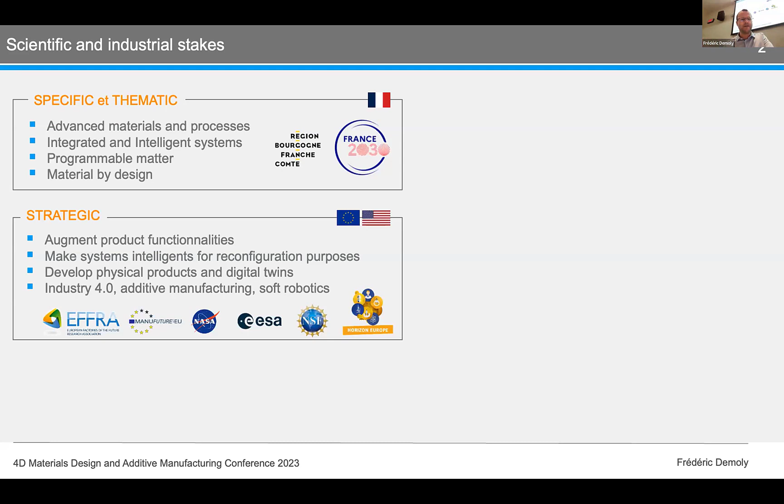We can also see some specific topics at the international level, for instance at Horizon Europe or NSF, where the focus or the expectation is on augmenting product functionality, making systems intelligent for reconfiguration, developing physical products with digital twins and Industry 4.0 or even 5.0.

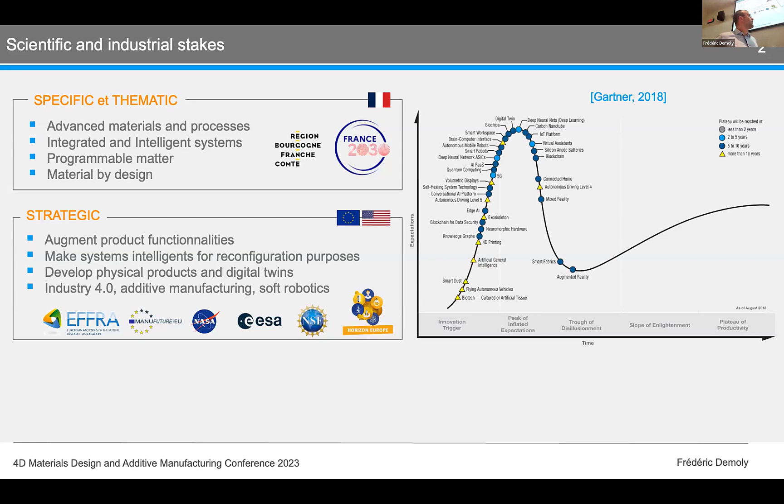I just integrated into my slide a picture of the hype cycle from Gartner from 2018, where 4D printing was at the innovation trigger stage. We can think that this technology is now at the top of the curve, and we will start a kind of disillusionment stage. So we have a lot to do in order to increase the TRL level of the technology, and we also have to find disruptive applications in order to demonstrate that this technology has a future.

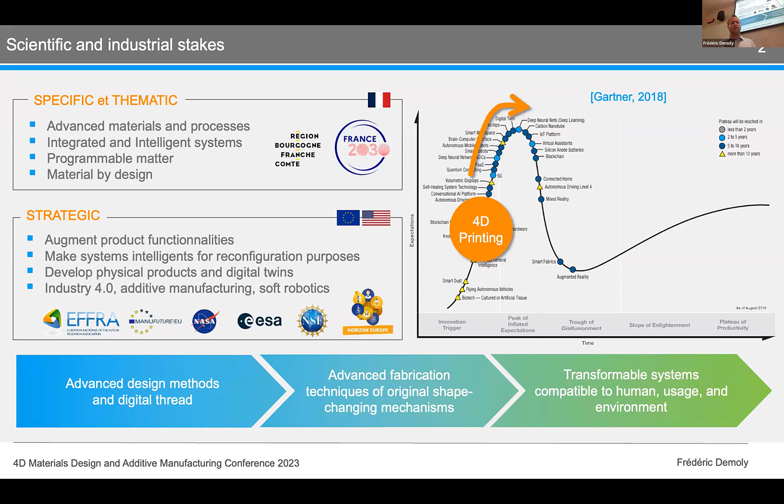For all of these reasons, my research group and I have developed efforts in advanced design methods and digital thread. We are also focused on advanced fabrication techniques of original shape-changing mechanisms to create transformable systems compatible with human usage environments.

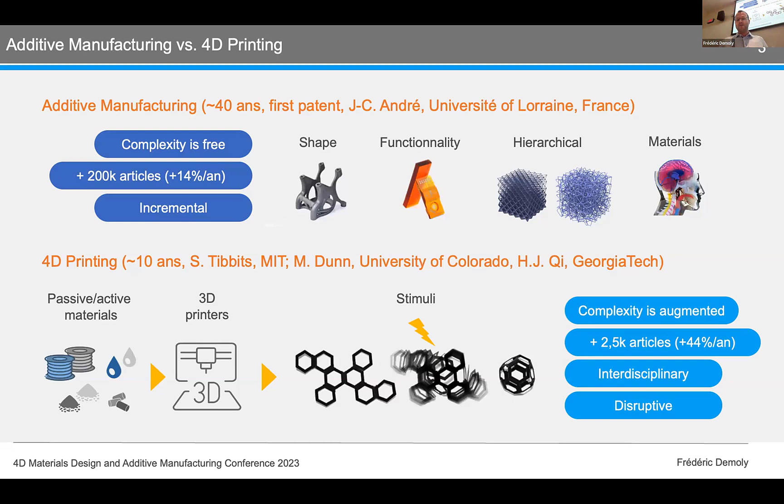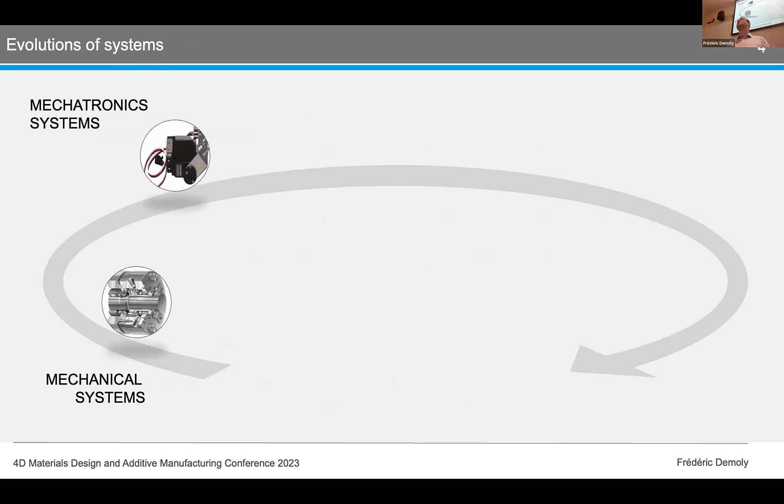What I can also observe from a system point of view is that the design efforts were made so far on mechanical systems, mechatronic systems, and over the last decades on connected objects and cyber-physical systems. And what we can see from the research agencies is that much more is expected from smart systems.

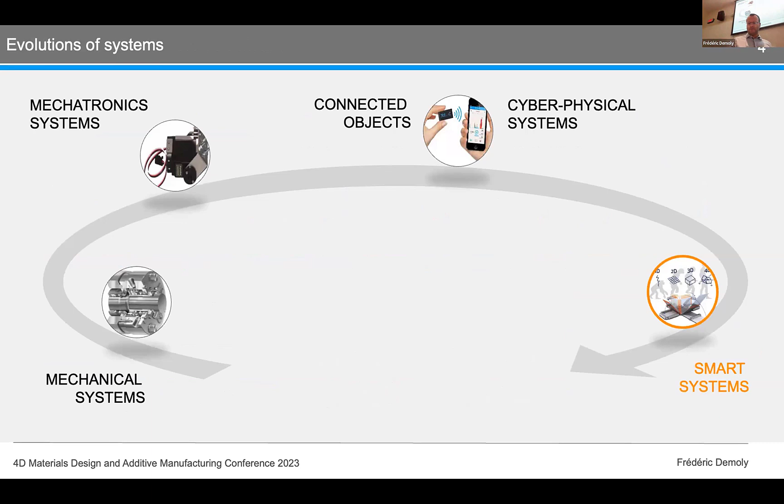And we can also give an estimation of the capability maturity model for each system. Most of them are at the top of the capability maturity model, called optimizing, and smart systems are still ad hoc. This novel technology is still developed in the labs.

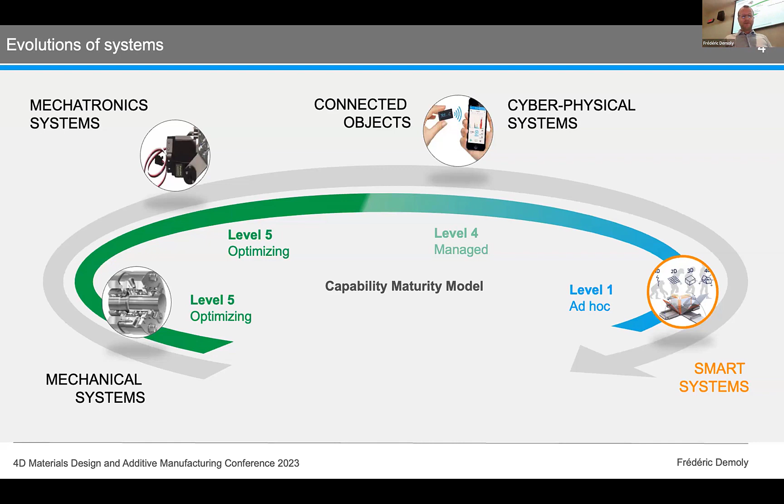We can also highlight some industrial initiatives toward smart systems in the car industry with the BMW concept car. We can see some tires from Hankook, some shoes, even some stents. And through these case studies, or these innovative concepts, we can see that what is expected is systems that are adaptive, reconfigurable, deployable, and transformable.

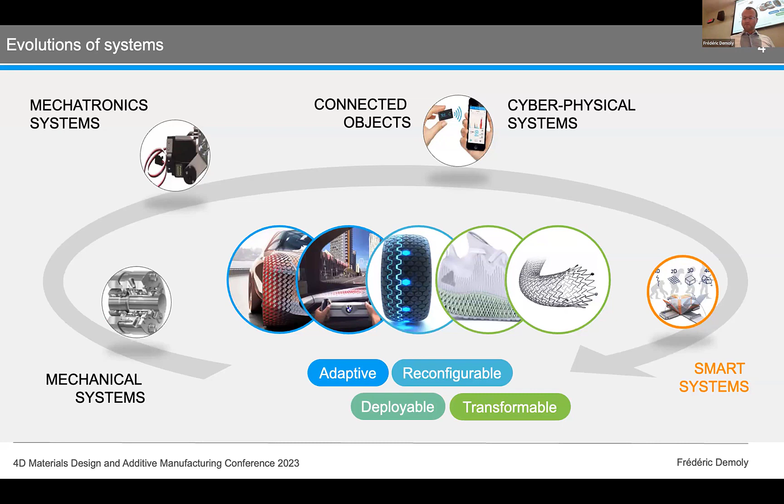I tried to sum up 4D printing in 2 slides to sum up the research efforts. The main efforts are focused on single-material 4D printing, which means that we use only one head, let's say, and we print the smart material, and we can exhibit a shape change by playing with the printing path or with the polymerization intensity.

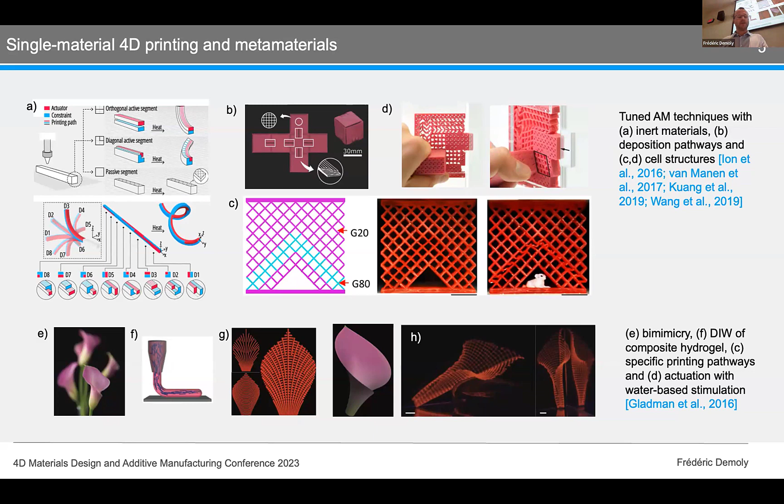Another strategy is multi-material 4D printing in order to improve the mechanical performance of these soft materials. The idea is to combine active and inert material into a single structure.

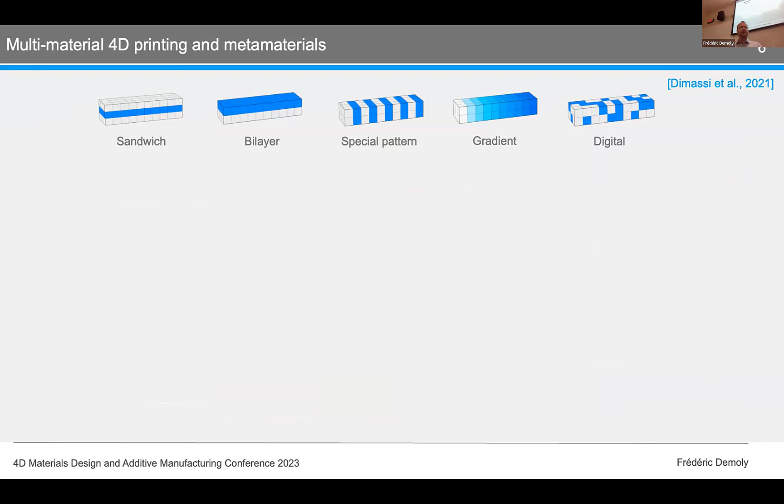Here, I just put some material distribution categories, from sandwich, bilayer, special pattern, gradient, and digital, to which I introduce some examples. We can see here that the idea is to properly distribute the material in the structure in order to achieve original or specific shape changes.

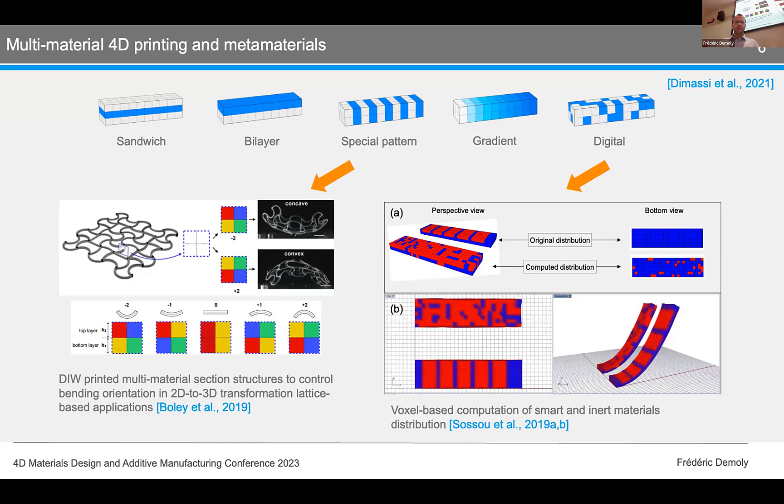I also tried to understand the current state of smart materials in terms of mechanical performance. So I drew some diagrams that show on the x-axis the main categories of smart materials: SMP, SMA, piezoelectric, hydrogel, IPMC, LCE, compared to muscle.

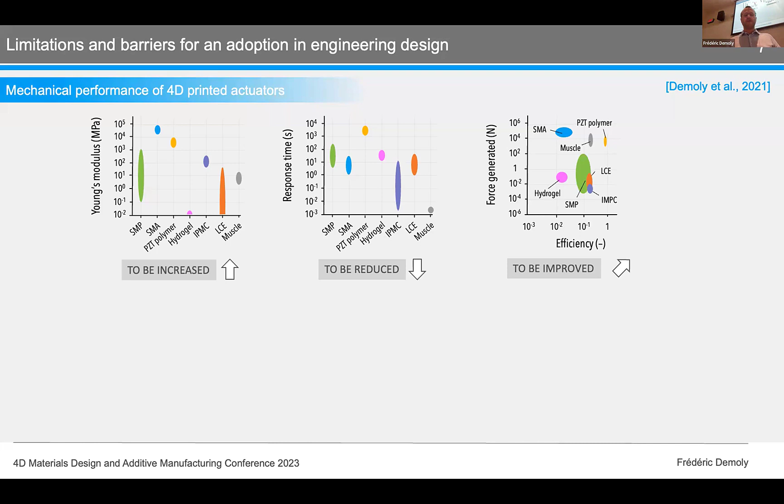And the idea is to put effort in order to increase their Young's modulus, reduce response time, and improve their efficiency, even their force generation. And what we can also highlight is the limitation related to the process.

The process of smart material elaboration is very hard for non-experts to develop smart materials. They are not available. They need tuning steps. They have limitations in terms of functional fatigue. We have also some limitations in terms of the additive manufacturing process, in terms of material-process couplings, multi-material capacity, induced anisotropy. That is sometimes an advantage for 4D printing.

And also another important aspect is the third pillar of 4D printing, I mean stimulation. So we have to consider the temporal effectiveness. We have also considered that the stimulation can be inside the structure, can be local, and we have to consider the place of the stimulators.

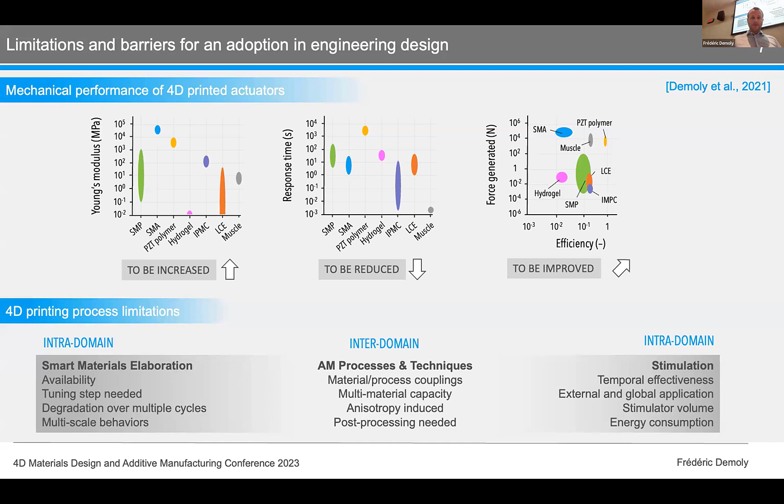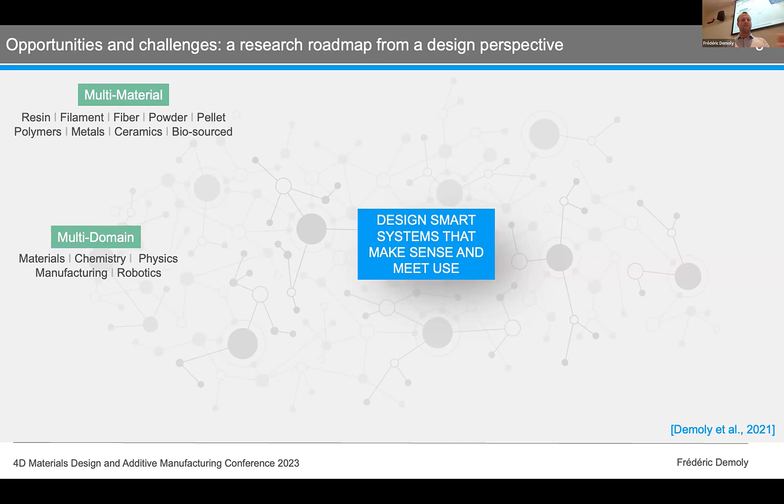So for all these reasons, I try to build a research roadmap from a design perspective, where the main objective is to design systems, smart systems that make sense and meet use. And to do so, we have to consider many facets, if I may say: multiple materials, multiple domains, material chemistry, physics, engineering, robotics, manufacturing, multiple additive manufacturing techniques, multiple physics and energy, multiple scales and temporality.

We have to consider also multiple functions and multiple worlds. So most of the effort is made on the physical world. I'm working also in the digital world. We have to connect this world with the cyber and the social world in order to improve interaction between the user and the object.

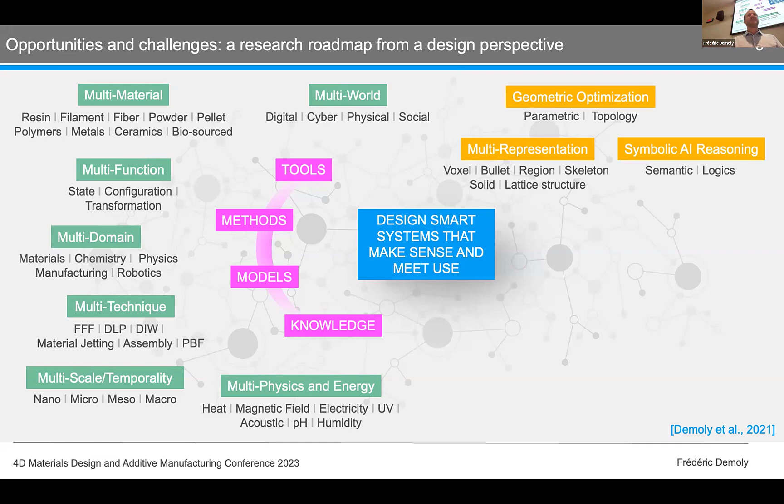And to propose something strong, we need to put efforts on knowledge, models, methods, and tools with specific reasoning procedures in terms of geometric optimization, multiple representation, symbolic AI reasoning. Through symbolic AI reasoning, I mean ontology, I mean providing qualitative reasoning. We can also address connectionist AI reasoning through machine learning, deep neural networks, and biomimetic computing.

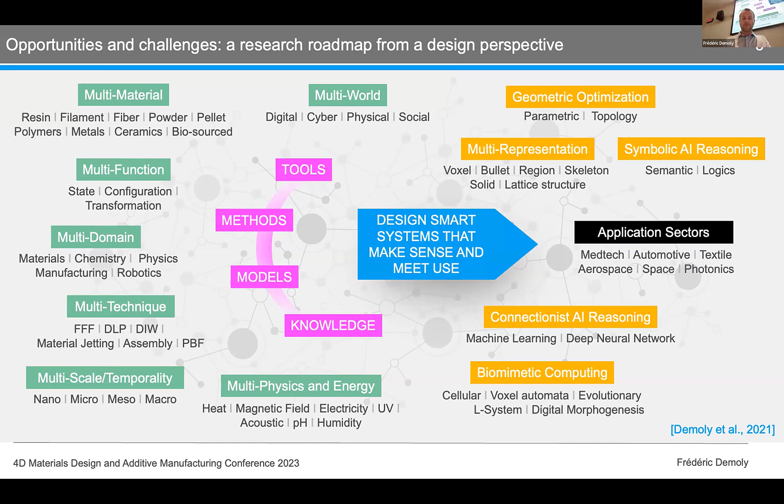And the last one is to have some target applications in specific application sectors. Without this last part, any design method can be useless. So I try also to sum up the contribution, or let's say the aspects we have to cover in design.

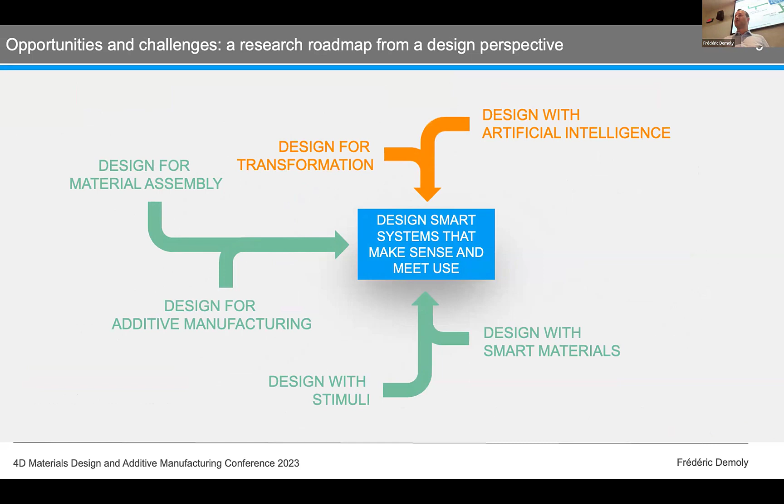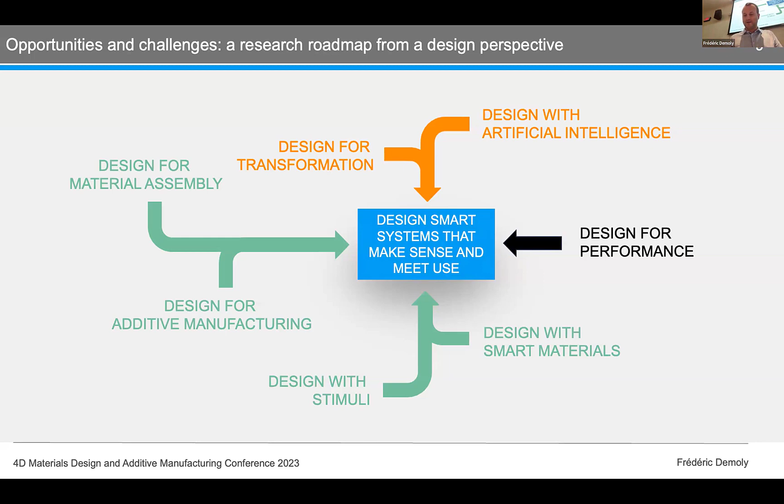If we want to design for 4D printing, this means that we have to design for material assembly. We have to design for additive manufacturing. We have to design with stimuli, with smart materials. We may also provide some sort of solution in order to design for transformation with AI, for instance. And we have also to design for performance. So we have a lot of challenges. Probably I will have a lot of work during the next 3 decades.

So in terms of knowledge, what we have done over the last 3 years is building a kind of knowledge base in which we can capture any kind of knowledge from experiments, from simulation, from literature. And the idea here is to structure the knowledge at the object level and for various purposes in order to provide guidance, assistance, recommendation to all users involved in the 4D printing process. I mean, product architect, material expert, product designer, and even a process planner.

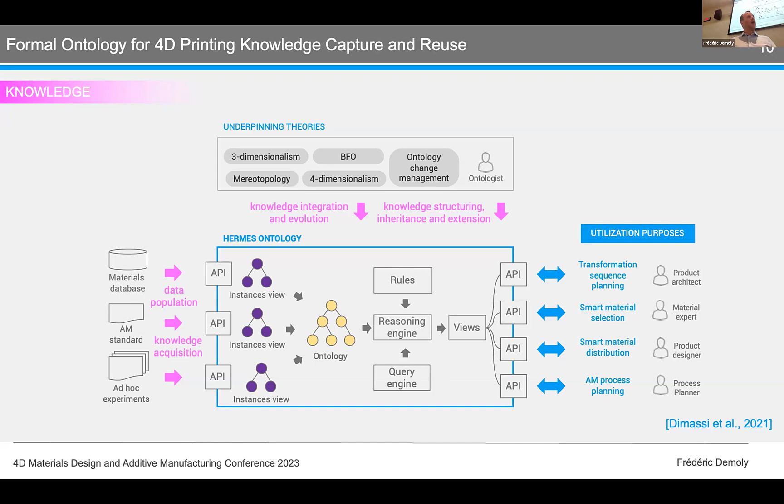And this ontology, this knowledge base, is also driven by underpinning theories like 4-dimensionalism, 3-dimensionalism, in order to understand how an object can evolve over time. I just put some part of the ontology. So the ontology can be understood as a knowledge graph. I mean that the blue circle represents the knowledge, and the connection between the blue circles means the semantics.

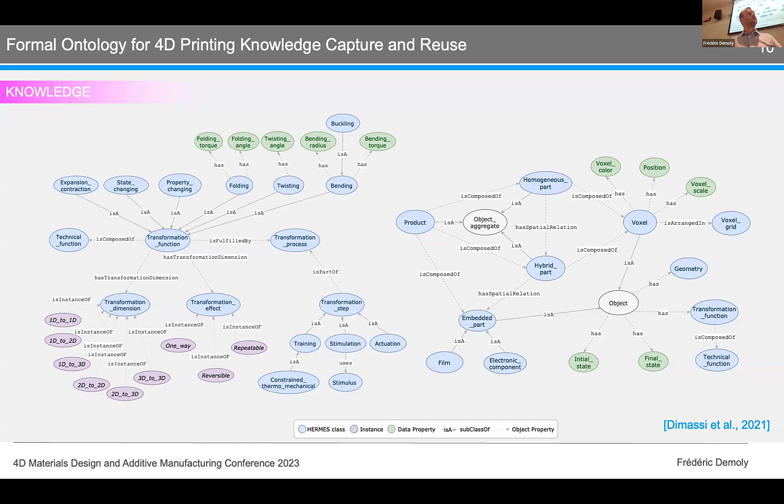With this kind of graph, we can understand a scientific domain. And the green circle means the data property, and the purple circle means the instance. The instance comes from what is published, what is experimented, what is simulated. Based on this ontology, the idea is to capture knowledge, but the end is to reuse the knowledge or to propose knowledge to any kind of new project.

So the idea is to develop a new approach called the semantic similarity vector space model. And the idea is to compare, for example, a specific need or a specific target with experiments captured in the ontology. For this case, we decided to provide a reasoning recommendation procedure in order to propose smart material distribution in a structure. So starting from a solar panel deployment issue, the designer may want to apply a specific energy, may want to apply a specific

timeline, etc. And this knowledge is instantiated into the process flow, and the reasoning is able to provide the experiment that fits best with what is requested. So we implemented a specific in-house code in a Rhino Grasshopper environment.

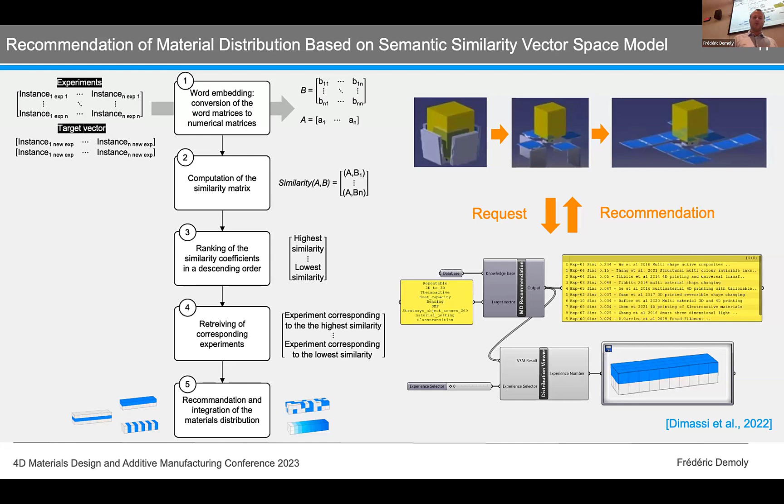In terms of models and methods, we also use a voxel-based model in order to simulate very quickly smart material distribution into a structure. The idea is to get very quickly an answer in order to get the design of the structure. So from a rough geometry, we're able to discretize the geometry into voxels, and each center of voxel is connected to each other in order to construct beams, and we put the material modeling onto beams, and we are able to simulate very quickly this kind of behavior.

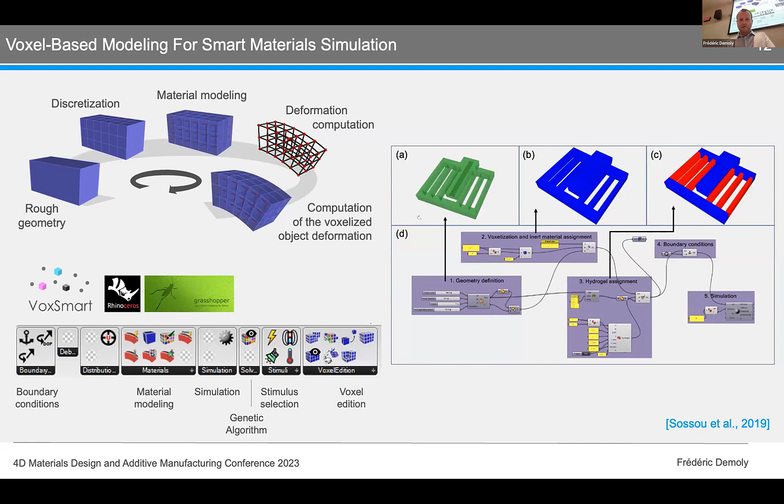This simulation tool has been implemented into a Grasshopper plugin called VoxSmart, and we can edit the geometry in terms of voxels. You can apply multiple smart materials inside. You can also simulate, and let's say in a couple of seconds, you can see the shape change. Due to time reasons, probably I will skip this movie, but during the questions, I can show the movie to everyone.

By knowing how a shape change can occur with a specific stimulus, the idea from a design point of view is also to provide solutions for the inverse design problem. So from a design point of view, we know the initial state, we know also the target state, but we are not able to know without any simulation what will be the smart material distribution with active and passive material. So the idea is to use a genetic algorithm in order to compute and find counterintuitive distributions.

So you can see on the right part an example of what we have done with the software. We have simulated a spatial pattern distribution, and the distribution that seems to be weird has been computed by our software.

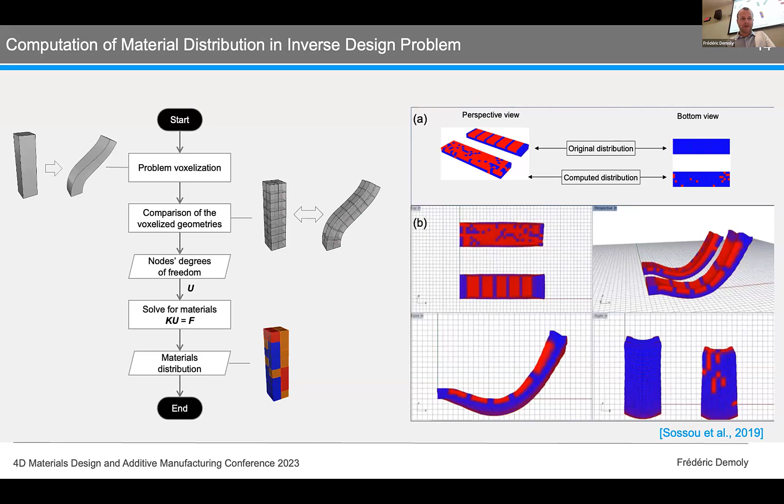We also try to make some kind of topology optimization. The idea is to integrate void into the structure. Why integrate void into the structure? In order to improve the efficiency of the shape change we want to achieve. If I minimize the smart material, for instance, I will also minimize the use of energy stimuli. And what we have done here is we have integrated a third material into the genetic algorithm. This third material has been considered as void, without smart property. And we get similar shape change with less material.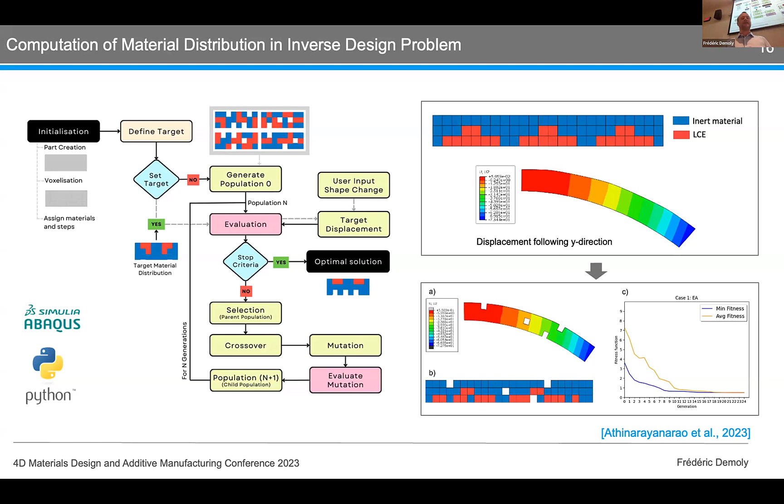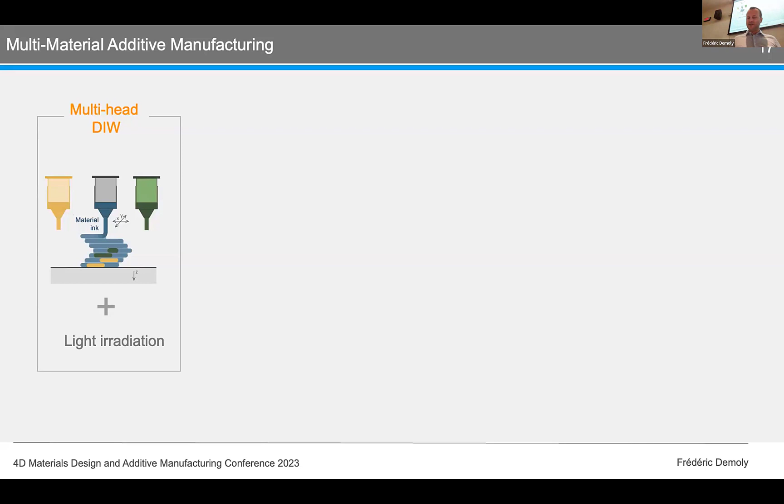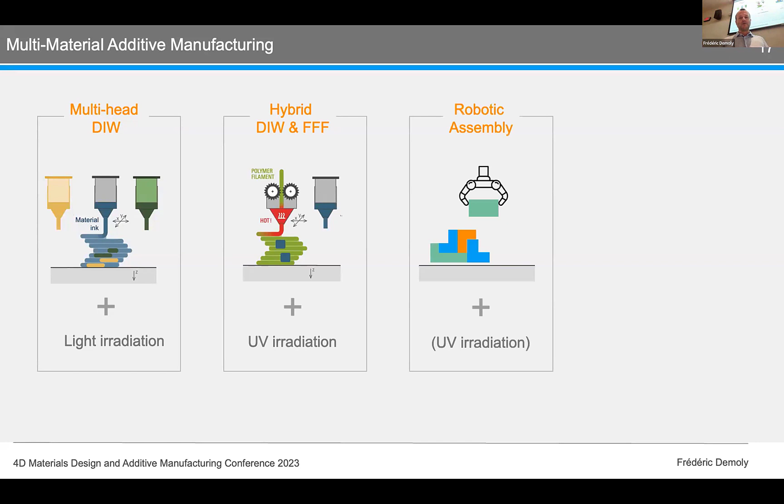So with this kind of progress, from a digital point of view, we are able to build any kind of structure. We can simulate any kind of structure, even with dissimilar materials. But if you want to print them, we will have some difficulty. So we investigate different multi-material manufacturing strategies. We investigate multi-head DIW with light irradiation. We also develop hybrid DIW and FFF to print multiple materials. We also investigate robotic assembly of voxels or even polycubes. And we also have patent pending technology that is still secret for today, but I hope that I will be proud to present the technology next year.

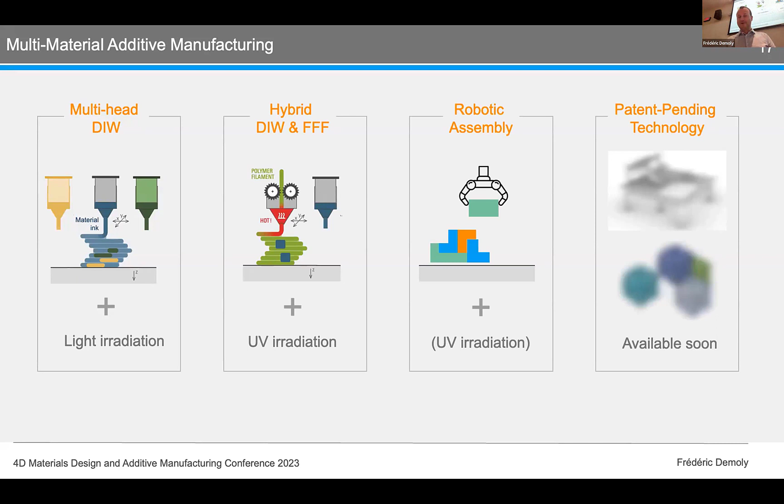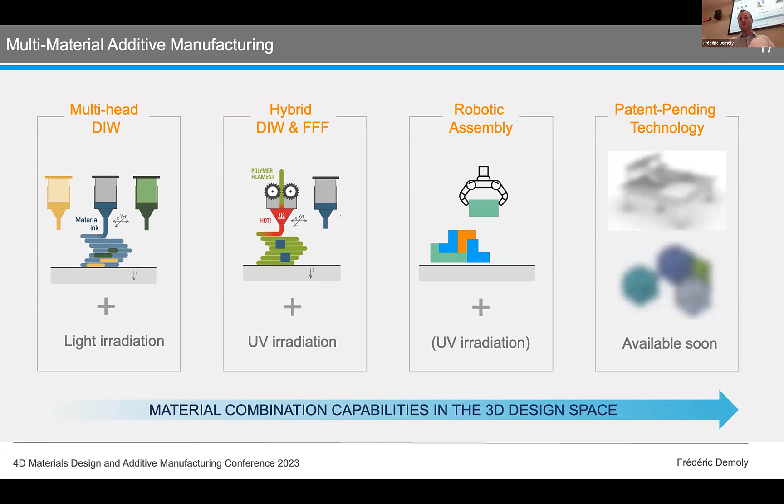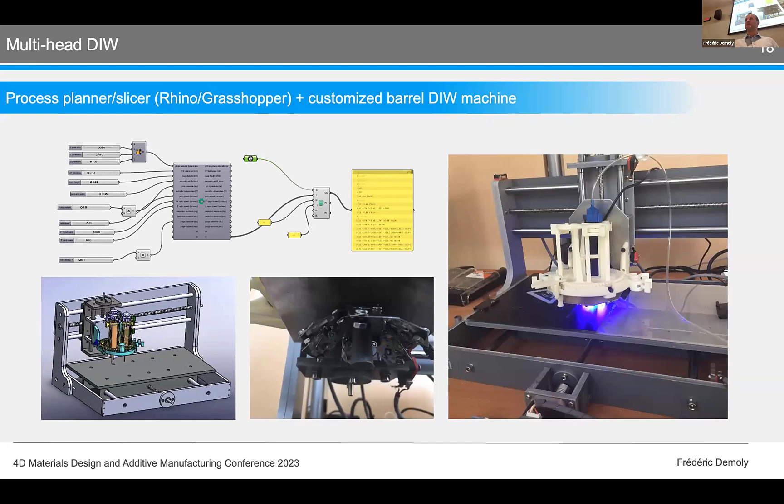So from the left to the right, probably we will be able to have more freedom in terms of material combination, even in terms of dissimilar materials, for example, between polymers and metals. An example of the different machines we built. We built a multi-head DIW on a CNC machine, and the multi-head uses a barrel device. This means that we can rotate the DIW. We also put some UV on this specific head. We developed specific code in Rhino Grasshopper in order to control the machine.

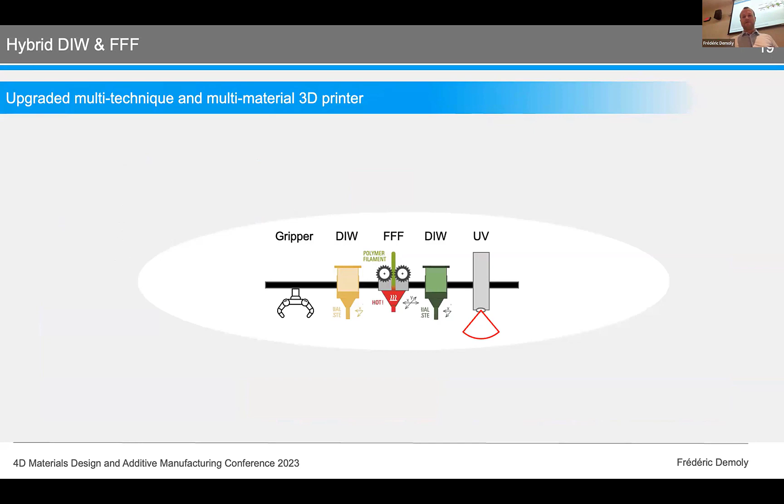We also upgraded a multi-technique and multi-material 3D printer. This means that on the gantry, we put different heads: gripper, DIW, FFF, even UV. We use an American machine called Hyrel 3D, the open source 3D printer. We also use the S2000 Omnicure UV curing system with different heads. And the idea is to combine different materials together.

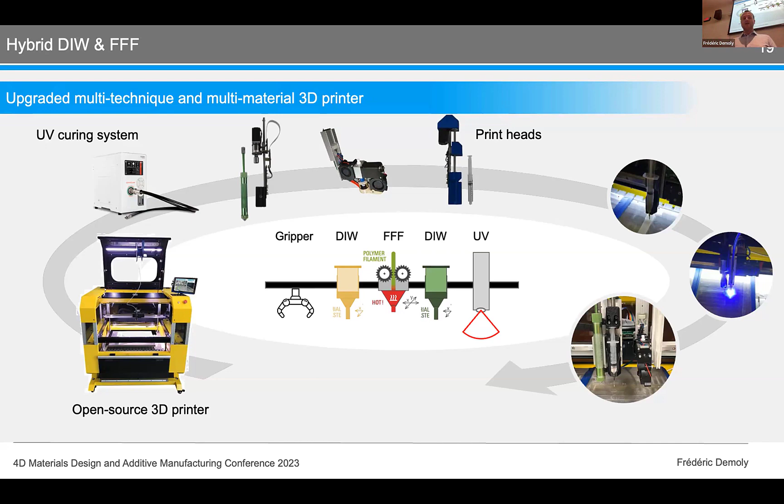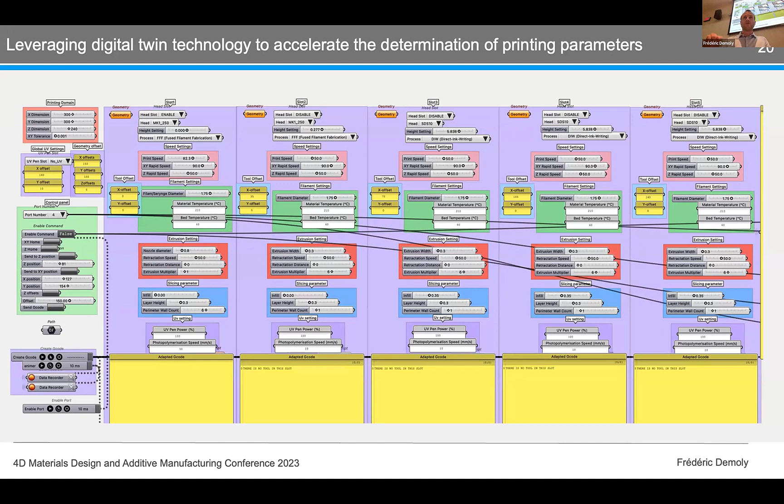But each step generates not a limitation, but complications. We have to find appropriate parameters. So building such a machine requires a kind of digital twin. So we developed software in order to control each head and also to ensure a closed loop in order to have real-time adaptation. This means that the system will be combined with a camera in order to receive data and provide digital image correlation. And with this kind of software, we will be able to control the printing parameters in a single print.

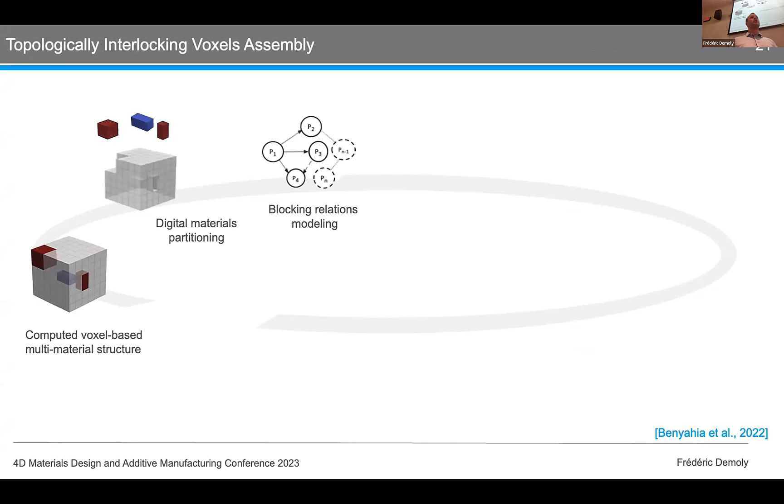We also investigate topologically interlocking voxel assembly. So let's imagine that with our software, we are able to compute a material distribution, which is similar to the part I presented here. And with this part, we are able to partition the structure in terms of material, and we will extract the blocking relation in terms of translation. And based on this blocking relation modeling, we will be able to generate automatically interlocking polyvoxel assembly computation.

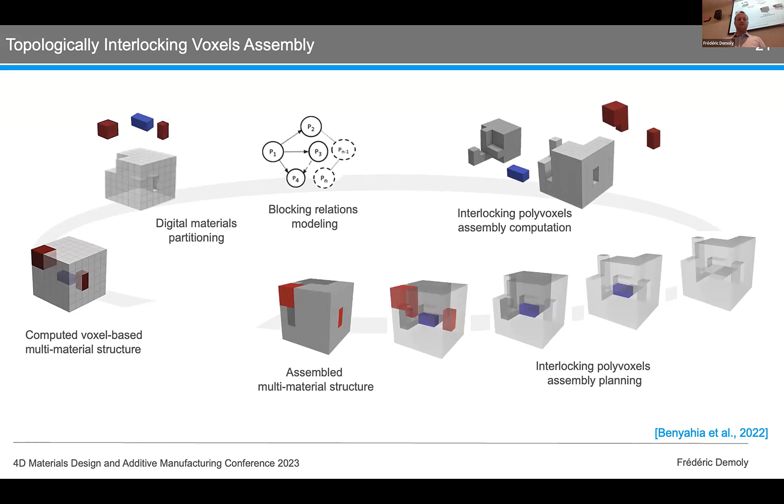And then, based on this interlocking polyvoxel, we then generate the assembly sequence, I mean, the order in which the parts are required to be assembled. So it's a kind of strategy between 3D printing and assembly, which we can call 4D manufacturing.

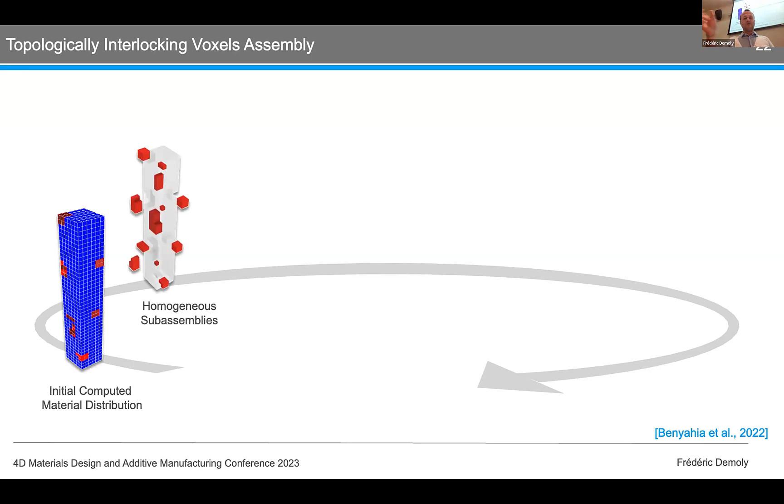An example here is provided with this beam. We have two materials with a specific distribution which come from the simulation. We extract the homogeneous subassembly in terms of material. We then generate interlocking voxels with a key interlocking part. The key interlocking part here means the part with which we ensure that all voxels are blocked. And then we assemble them together.

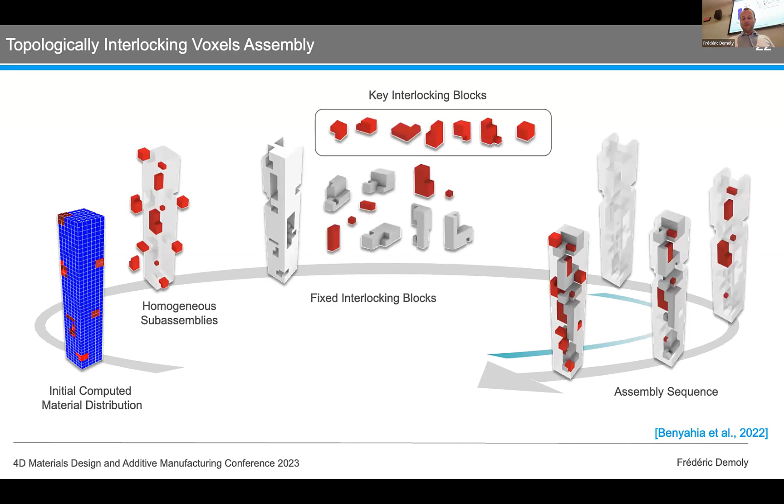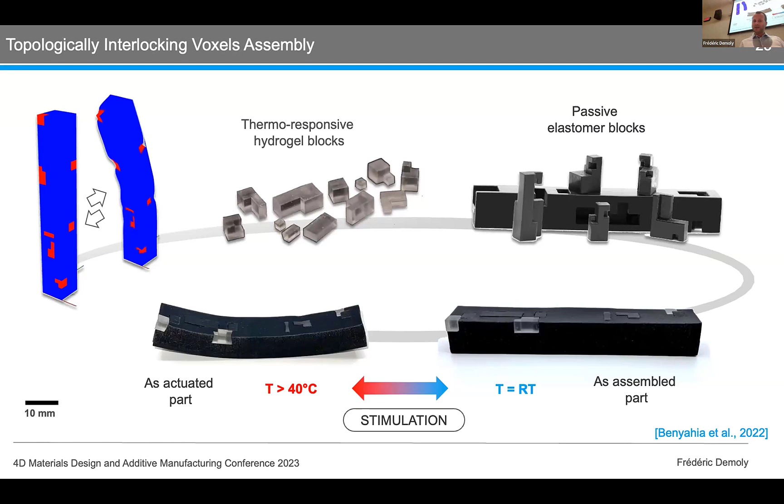We also try to implement the technique from the simulation. So we print thermo-responsive hydrogel blocks with DLP. We also print passive elastomer blocks with material jetting PolyJet, and we perform the assembly with manual procedures. So we can see the shape change through a thermal stimulation.

So I don't know if I have time to present the video. I have to accelerate, probably.

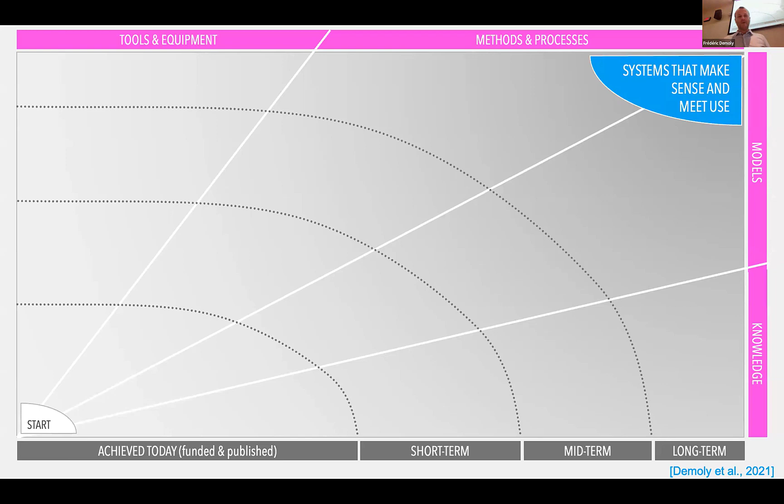Okay, go ahead. So in terms of timeline and roadmap, I draw on the x-axis the timeline about what is achieved today in terms of contributions published, what is currently addressed by my research group and my PhD students in terms of knowledge, model, method, and tools and equipment. So in terms of model, we are working now on large language models like ChatGPT. And we also use natural language processing in order to capture all the knowledge of the community.

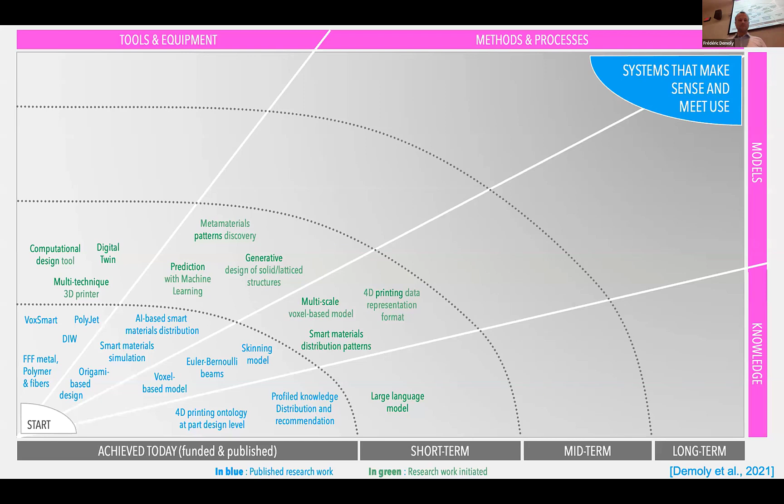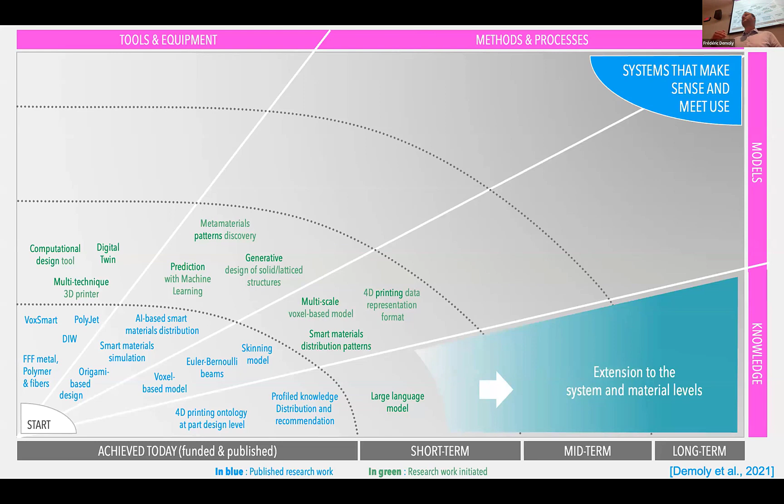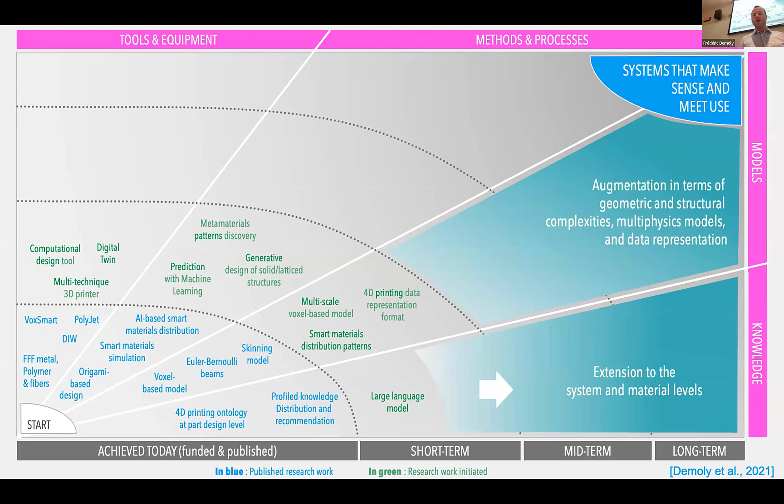We are working on multi-scale voxel-based models, smart material distribution patterns. And the idea, for example, from a knowledge point of view is to extend what we know, not only at the object level, but at the material level, but also at the system level, or even at the natural level. In terms of model, the objective is to augment the complexity in terms of geometric and structural, multiphysics model and data representation.

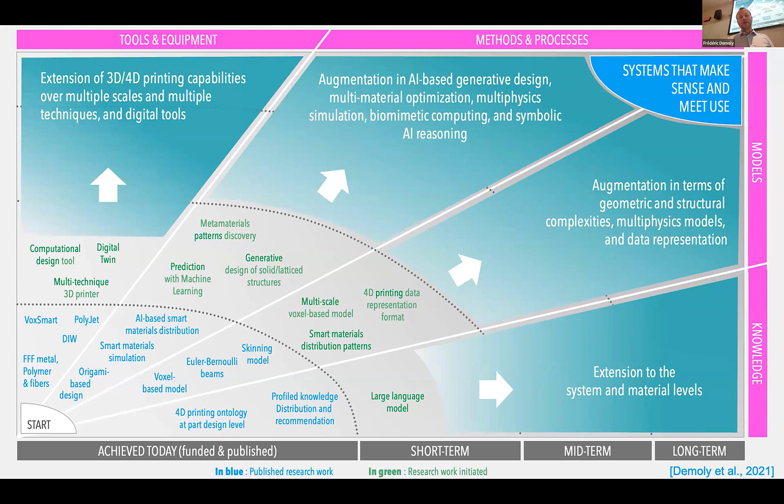And for methods and processes, we are working on augmenting the efficiency of our algorithms with AI through physics-informed neural networks, for instance, but also with the support of symbolic AI. And in terms of tools and equipment, we're working on increasing additive manufacturing capabilities at multiple scales and multiple techniques. And we are also currently developing digital tools.

This is my last slide. So I'm PI of a recently funded project by the French initiative. The project is called Artemis, and it means accelerated discovery and development of smart materials and structures with 4D printing technologies. So we received 1.5 million euros over 48 months.

The idea is to integrate AI, or let's say to develop computational intelligence, which combines material and design informatics with machine learning, and connect these innovative bricks to numerical simulation, physical experiments, published articles, online databases, whatever, and use this kind of technology to explore and discover new smart material compositions in terms of shape memory polymers, shape memory alloys, and LCE, but also to work at an upper level in terms of structure.

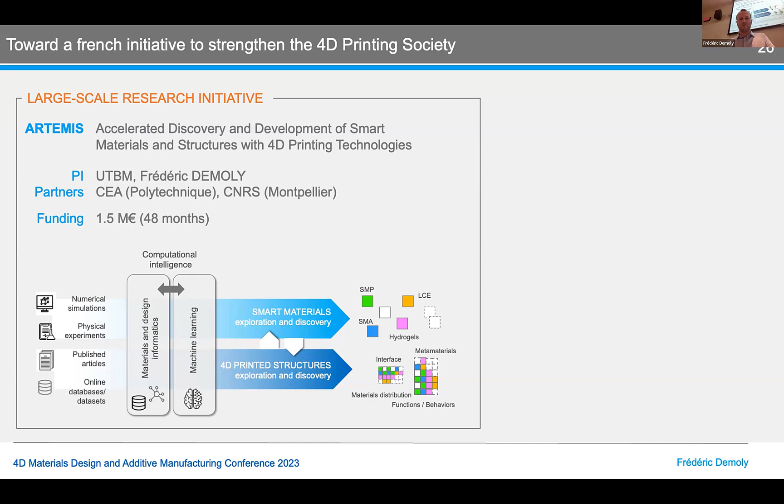And the idea is to try to explore and discover the appropriate material distribution pattern, work on the behavior at the interface and metamaterials. And I'm also PI of a special interest group that will be available in France in 2024. This special interest group is supported by the CNRS and is on smart matter transformation and 4D printing.

So all this latest information is based on two books I wrote with my friend Jean-Claude André, and I hope that this kind of initiative will help the 4D printing society to be better organized and will play the role of a bottom-up strategy, or even can be generalized to any kind of initiative in the US, China, Singapore, whatever.